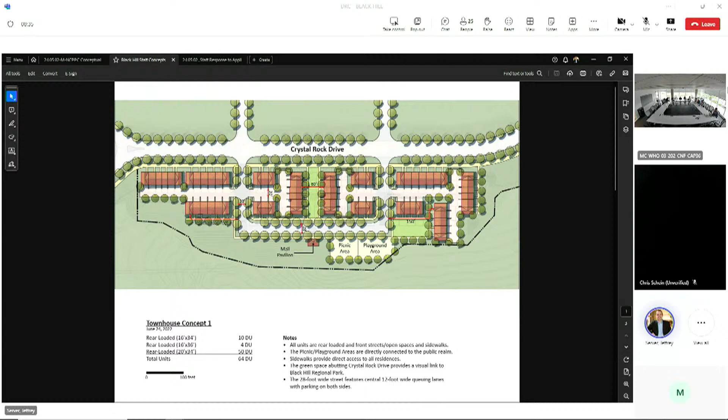So those were the overarching big picture comments we had looking at this. I'm happy to flip through the other schemes if helpful, but they all more or less try to establish the same general idea. It's also worth noting that in all of these schemes, there's a clear distinction in having the fronts face out onto public open space or public streets, so the units are oriented in a manner that fronts along that.

One of the concerns we've had in looking at the orientation of the units is trying to distinguish fronts from backs, and backs facing to fronts and so forth. When they're arranged along that alley, it gets a little fuzzy as to what's the front and what is the back. So these previously prepared schemes really set out to try to address that.

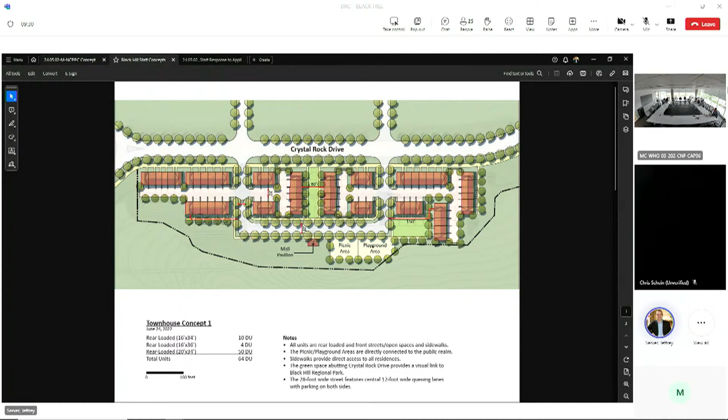I'm happy to turn it over, but I'll share one thing here real quick. This is a sketch that was prepared within the last couple of days, so it's fresh, hot off the press, for lack of a better way of saying it.

It's something we've not had time to share yet and circulate with everyone. This scheme, I'd say, revisits some of the concepts and ideas and comments we've provided previously from the other sketches, but tries to work with it in a way that also respects what has been shared within the current set of drawings.

This scheme does keep a similar type of layout to what has been proposed. In this case, there is that service drive, but the alley is broken up with two curb cuts, much as you saw in the previous sketches.

There's also an opportunity to provide a loop. So where you see it labeled New Street, you have access to the alley, but then you also have this new street, which provides a number of parallel parking spaces for visitors. And then there's also dedicated parking at the ends to the left and right of the units, so you do have a distribution of public parking.

Parking is a big concern. We've heard from a number of applications coming in that this is a growing concern within existing communities as well. So being cognizant of that, this seemed like a good opportunity to introduce some of that within the scheme, while also hoping to accomplish the goal of providing direct, connected access to the playground and amenities at the rear of the site.

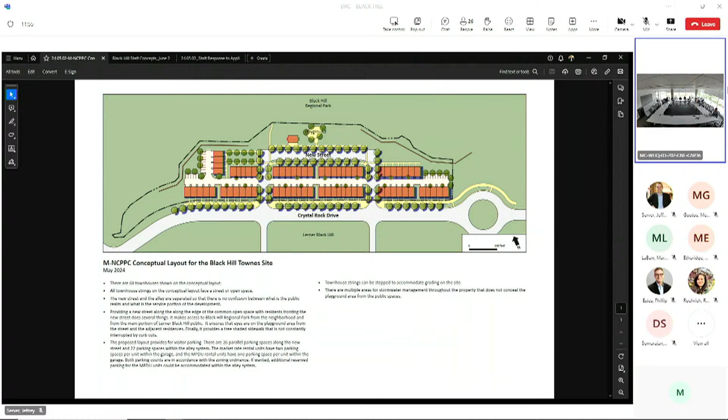So with that, I'll wrap up and turn it back to you, Philip. Okay, thanks. Thank you, Jeff. And then we'll just turn it over for discussion to the applicant.

Sure, thanks, we appreciate everyone's comments. We certainly saw this, we were able to download it yesterday, haven't had a chance to fully evaluate it. There are a number of concerns we have in terms of feasibility, utility connections, what this does to the units themselves, eliminating all driveways, the feasibility of it given the expanded impervious area and the need for more stormwater, with really no space to accommodate it.

So our goal for DRC today has been to go through some of the more interagency-wide comments while we have everyone here to talk through a lot of those, realizing we probably need a separate follow-up meeting with you all, which maybe we could do at that slot next Tuesday, to dig into the layout comments we received in more detail after we also put together more information on our end to have a meaningful discussion on it.

So if that's okay with you, we'll shift to some of the comments that I think involve multiple agencies while we're here, and we'll dive in.

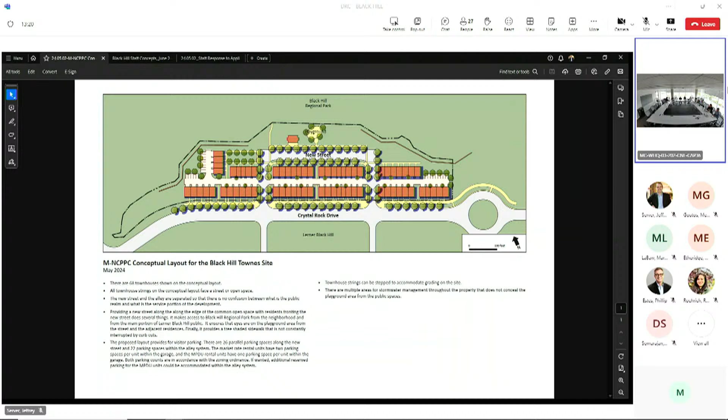There were several comments regarding the retaining wall, some of which I think are easy. There was a question to add top of wall height, bottom of wall height - we certainly can provide that on the plan. But Pat, do you want to give a little more explanation and context for the retaining wall and the challenging grades on site?

Yeah, and like Liz said, we can absolutely add the additional labeling to the spots that are in there - kind of hard to see because the text is small. But what we have here, generally speaking, is that in the center of the property it's more or less flat from front to back, but as you go to either direction, left or right, you get a valley on one end and a hill on the other.

So we have a cut and fill situation on either end of the property as you look left and right on the screen. I think particularly what Doug mentioned was on the left side of the screen, that wall is awful close to the conservation easement. Well, all the walls are close to the conservation easement.

That side is in cut. So on the left side of the screen, we're shearing down, so we are aware of that. Our thought there is that would probably be a permanent sheet and shoring system. We just did this, you can go see it. It's built now at Montgomery College, the PIC MC site. That same situation, it was right against the easement. They just sheared it down and built a wall in front of it. There's no footing or anything like that.

So regardless of the easement, if our LOD is going to be where it is, we just need probably to have that kind of wall system here. In order to avoid that, we have to be grading back into the forest conservation easement 30 feet or something, not to mention layback if you had a traditional wall system. So we're confident that can be built as shown there without encroaching on the easement with a footing or anything like that. And on the right side, luckily we have the opposite.

So we have a fill situation. So we'll just be working up from the toe of the hill, probably with like a segmental system where it's simply a fill system. And therefore we should be able to handle both ends of this thing.

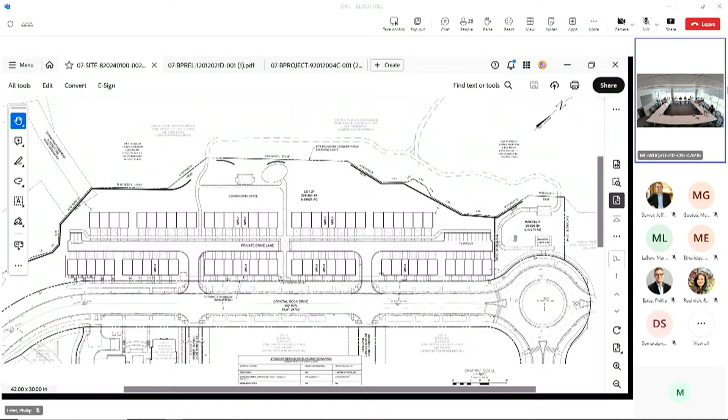Okay, so there were two other clarifications we were going to provide in the PUE. Sam, you might remember from years ago, this whole development was master planned without PUEs. The idea was to have street activation as much as possible, and not lose that 10 feet at the front for urban design. So that's been the case throughout Black Hill.

This frontage does have a Potomac Edison easement 10 feet wide along the frontage, not the entirety, but most of it. That was because when they installed the substation out there, they needed to run certain feeders, and that's the only way they could do it. So our plan was not to grant a new PUE, but just leave that Potomac Edison easement that's there. They're the only ones that needed it. The gas and communication has all been master planned through the community.

We're not running dry utilities longitudinally along the frontage, are we? Not the plan right now, just what Potomac Edison's infrastructure already has in there. Actually, I take that back, I think there is in that same easement. I think we were proactive and put some communication conduits in there, in coordination with them, just in case.

You have what appears like steps and stoops in that easement, is that correct? No, the easement stops at the second driveway on the left. So the steps that are created, that's that grade issue I was talking about. The steps on the left are as that easement ends, and that's critical too, to allow those, because we have to get up to these units. So we don't want to add a PUE where we didn't need more easement.

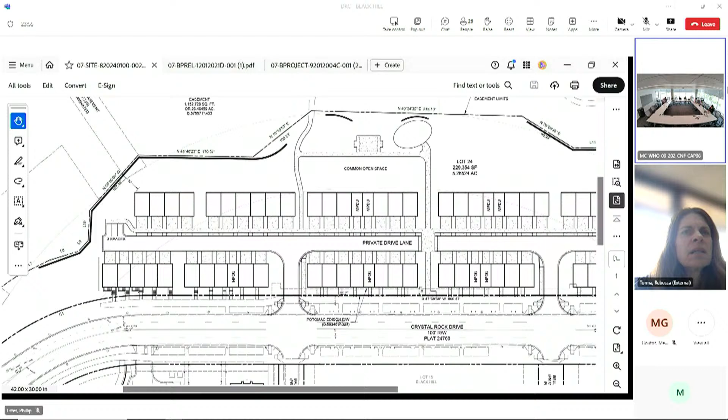I'd like to see a letter from them, because they are more strict than Pepco, that they're accepting of those concrete walkways in their easement. You're talking about just the lateral crossings, the ones that cross perpendicularly, is that what you're saying? Yes. Or whatever else you put in there. Anything you put in there, I want to see a letter from them saying they would accept that. That's fine.

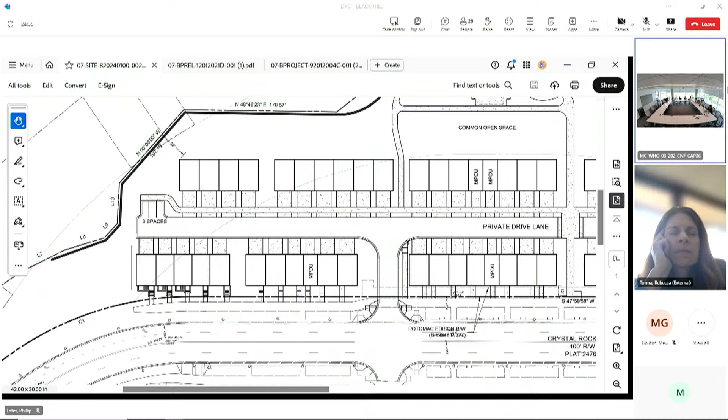Can you provide a note to the extent of the plan? Yeah, I think we may have a conceptual utility plan. Can you put a general note to the extent on the cover sheet? That would be great.

Okay, and then there was another comment, Sam, that you had regarding ensuring these private streets were built to public road standards. I think we just thought we were going to clarify that because it's all going to be constructed as one lot, they won't actually be private streets. Yeah, so it's like a drive lane or something. Yeah, basically the idea is this is going to be one big property, similar to a multifamily property, where it's just internal networks.

And that's also why we didn't have truncation. I think that was another comment that Liz will bring up, that there's no subdividing going on. So, yeah, okay, if you don't have any private road, then I guess the comment is no longer applicable.

Okay, moving to height, there were a couple comments regarding height. We just wanted to seek clarification on one about providing setbacks and height for accessory structures. Melissa, I think that was your comment too. I just wanted to clarify what you were looking for with that, and what accessory structures you wanted us to show that for.

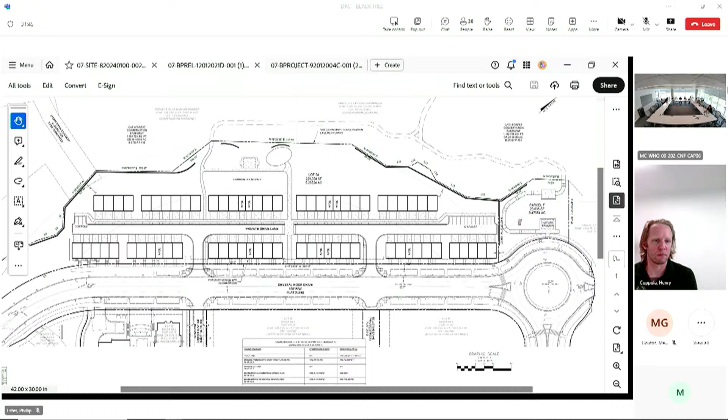Great, thanks. Pat, if we need to meet up or touch base, we're open to that.

Great. And then there were a few DOT comments we wanted to walk through. Pat, do you want to take those?

Sure. One was about truncation. Rebecca, I think you're on here, and I don't know if Deepak is. I think I mentioned the truncation. Our thought is we're not subdividing it, so we wouldn't do any kind of corner truncation. There really aren't any corners to truncate. So unless you disagree, that's how we would proceed there.

That's fine. And then on street parking, I think that was a comment from both staff and DOT about considering street parking on Crystal Rock, which under existing conditions is actually allowed from 7 a.m. to 7 p.m. The concern from DOT's parking folks was there are a lot of drop trailers and things that park in Germantown on the side of the street overnight, and they didn't want that happening in this community. So we looked at that as part of this application, along with sight distance and everything. Right now, the sight distance criteria would mean that, as the road stands today, you really couldn't have almost any parking along the frontage.

Now, if we look at moving the travel lane out, you could potentially get a little bit, but the challenge is, coming off the traffic circle toward the site from right to left, there's a quick need to channelize, and that's a little awkward. I don't know if we could make that work fast enough to get any parking, or maybe get a space. So it's something maybe we could look at offline with Rebecca and Deepak. But it seems like, because of sight distance reasons, parking is going to be a challenge on the street with the 2 curb cuts we have.

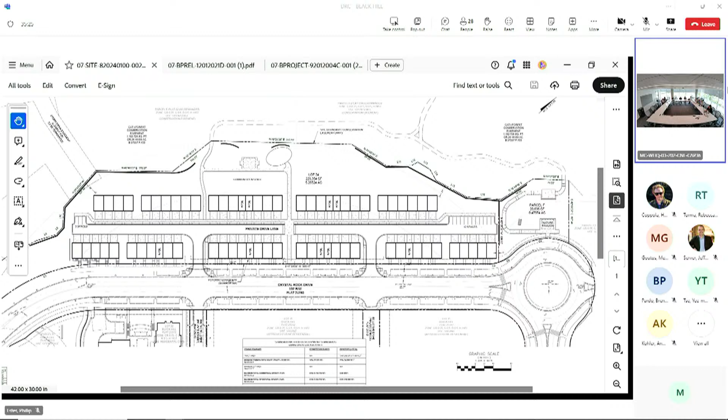How long are your driveways? You mean sidewalks, wide, you're saying, Rebecca? No, length. From like street to street, if you will. No, from back of sidewalk to the face of the building. 18 feet. The driveway. Oh, the driveways for each individual unit. Oh, in the back of it. Yeah, the 18 feet, yes.

So there's 18 feet on both sides, just one side has the dedicated sidewalk and the street buffer. If you're not getting any street trees in there, I'm not sure why you wouldn't put the sidewalk on the curb, because that sidewalk is going to be blocked.

That's likely to be blocked. I mean, I don't know that sidewalk really works. It just could be increasing imperviousness, and you might want to just let them walk in the drive lane.

I think we do have some trees. Actually, we have trees behind the sidewalk, in between each driveway. You can look at L401, but we do have trees on both sides.

Okay, I mean, obviously I have no real authority in that, but to me it seems like you're just getting more imperviousness, and the sidewalk's going to be blocked, especially if you're not putting a tree in between the sidewalk and the drive lane.

Well, I think Rebecca will clarify with Maurice - there was a comment regarding the parking, so we'll clarify that the parking is being accommodated within the garages for these units.

Yeah, but that's the problem we have - we understand that, but people use the garage for storage, and then they come to us after the fact and complain about parking. We have several developments in the county that have asked us to add more parking, and basically we don't have any space. My concern is that these are rentals, so maybe they will just keep their stuff in their garage and park their cars in the drive lanes. You give people options and they will use them.

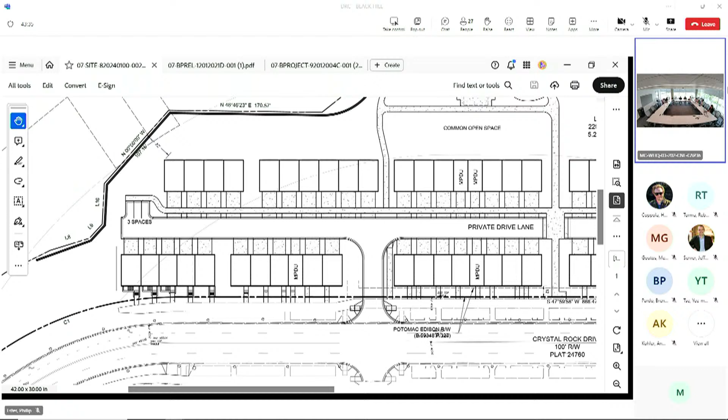But let us know if there's something else someone's looking for there. So you'll be able to have a continuous connection to the trailhead on the left of the page? Yeah, we'll fix this plan. That's just, right, it's just - okay, appreciate the clarification.

Henry, do you want to comment on anything that was said about parks? No, I think we're good.

Yeah, if it wasn't so steep and wild down in there, then we'd want to do the trail back into the park that way, but it's not going to work with the main stem of the creek back there.

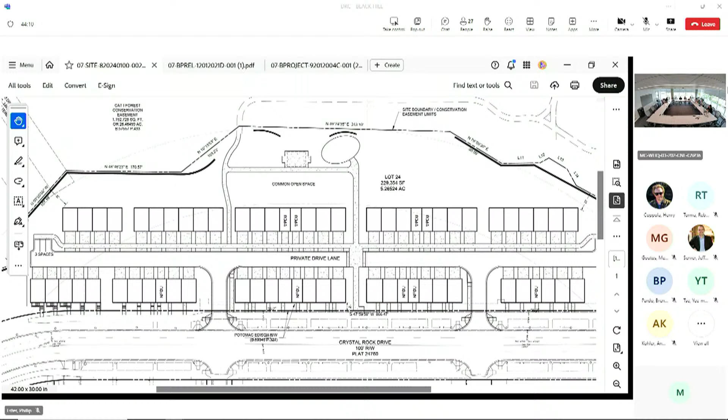Glad to reach out just to have a follow-up conversation to make sure we understand that too, just because we really thought that would be a great benefit to provide that trail connection there. But understand you're looking at different data, so we may just want to connect offline on that to make sure we understand it.

Yeah, sure. Happy to have you guys chat with Bob, our natural surface trail builder, for why he's not comfortable with that. But the short version is it's really steep and there's not a good way to get all the way down in there across the creek and back up in a way that we think is sustainable and good.

And also something to keep in mind are the terms of the conservation easement itself - it precludes any construction. So with the grade being what it is, I don't see a way of putting a trail in there without having to build a stepped kind of system, which then violates the terms of the easement.

Yeah, so I was going to ask that - so we're not going to add the trail connection to the park, let's say. But there was always a master plan to have this natural surface trail through this part of the campus, and then it connects to the hard surface trail.

The trail is drawn straight because it's intended to follow the contours. One trail that runs horizontally in the plan view is fine, as long as we can connect it around. The trail that juts off to the northeast, which drops down, was discussed with Henry regarding the grade issue. The other trail going horizontal, north-south-ish, is okay and fine.

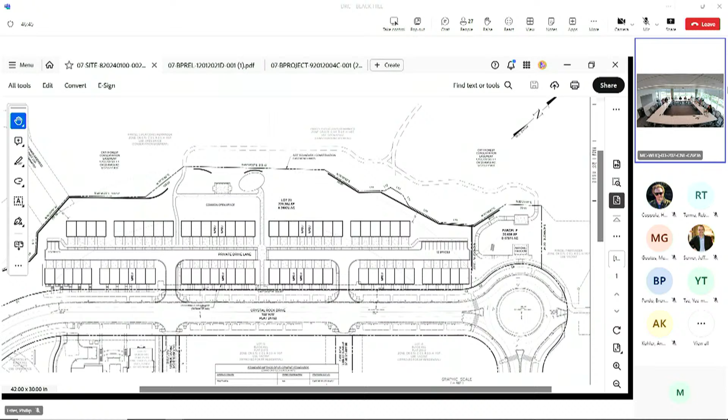Phil, do you have the date handy that we can connect offline on in terms of our first resubmittal date? I can email those to you. Either two weeks from today or two weeks tomorrow - I think it's two weeks from today, but I'll send you those deadlines. Thanks, thank you everyone.

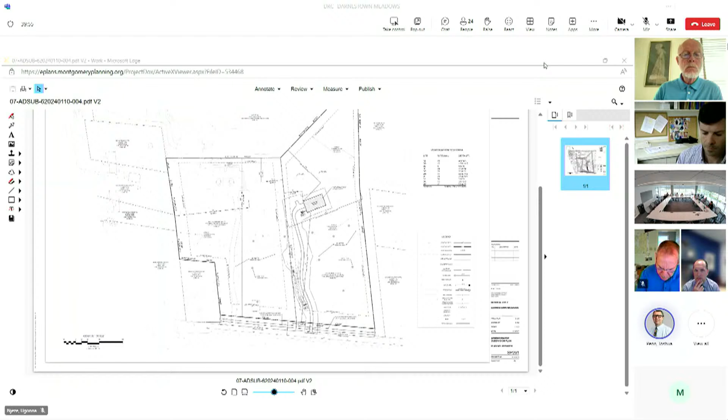Separately, Josh can speak about the forest conservation requirements and the triggers for those, which are different. The final forest conservation plan is required to be done prior to plat. Follow-through of the requirements is going to be tied to any construction activities moving forward, but whoever moves forward with it will be tied to whatever conditions are placed at time of the plan.

I just wanted to be clear. I know we're talking about the frontage improvement first, but the way you were responding made me think you meant all requirements. So I want to make sure it's clear some would be required prior to plat, some prior to building permit. The frontage improvements would be building permit. We wouldn't make you do any preliminary grading work or anything like that prior to that.

That's helpful. Thank you.

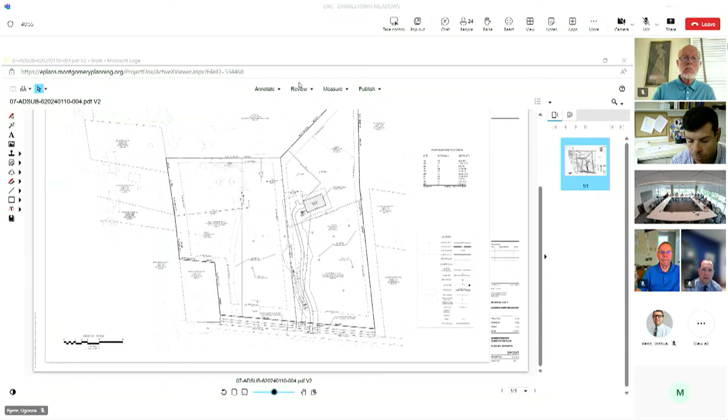Do you have any more questions, Mr. Marco? I didn't, thank you though. I think that was all. All right, okay, thank you everybody.

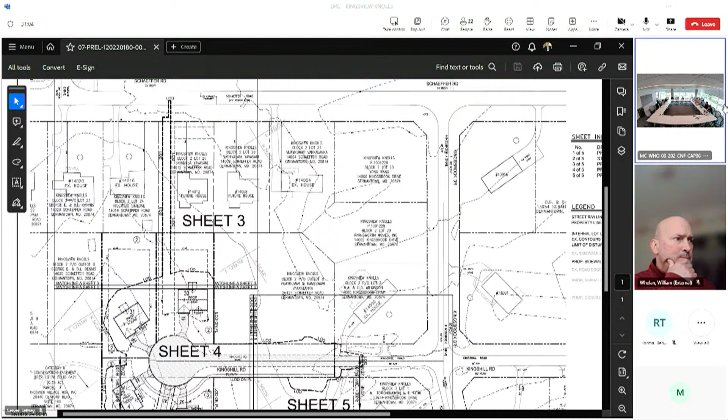And going across Coachman, that's asking people to tear their fences out and encumber them with the maintenance of a path. I just don't see how that can happen really, in the common sense world. So it's not that we're objecting on a technical basis. We're objecting on a private property entitlement issue.

And with WSSC, I don't know if they're on the call here today or not, but I've dealt with them for 40 years and I know how flexible we are. No, we are not. When it's an easement, no, because we use it for maintenance. So we don't allow anything over our easement, only crossing, like you said before.

We can talk about this later to explore other possibilities, specifically about this, because we really want the connection from the proposed development to Schaeffer Road for dimension reasons that I won't go into before. We were looking for the shortest distance possible. That's why we suggested that sort of shortcut, and it seemed like there was room and opportunity to do it.

If that's not the case, then we need to look at other ways to get there. Maybe around the proposed cul-de-sac extension, around the other way of the block. Because it is an important connection.

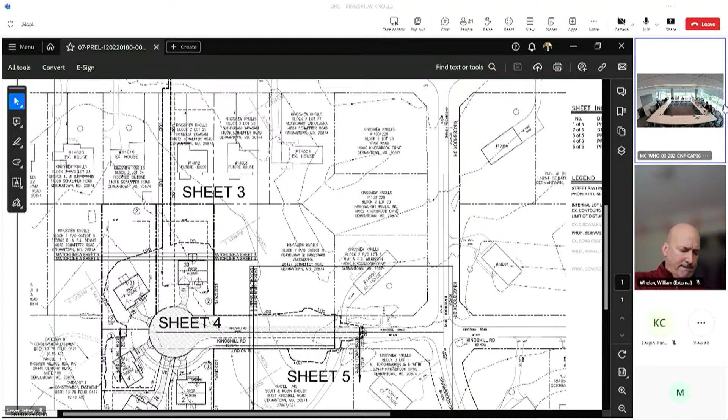Who do we need in the follow-up meeting besides planning? We need DOT? Yes. Who else? Stormwater management? Stormwater. Who else? Transportation. Okay, yeah, our team, yes, our team.

Just before we finish here, just to clarify, the WSSC easement that's shown there, is that existing or is that proposed? There is an existing 25-foot WSSC easement, and there is a requirement to expand that to 30 feet.

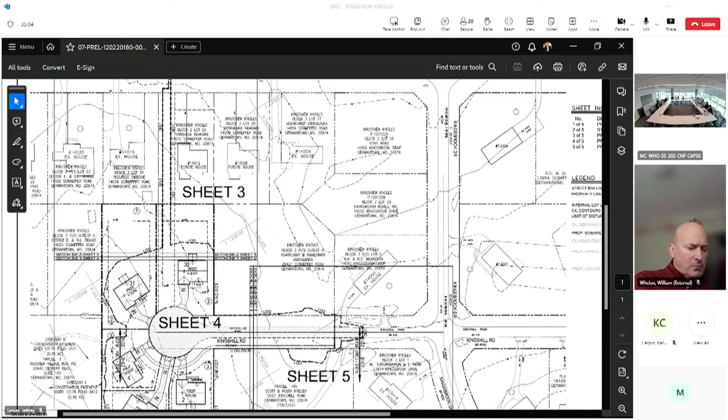That's shown going up and down on the page, right? From the cul-de-sac. I know people can't see this online, but I'm going to point it out for your benefit. This is the line between 24 and 25, and this would be the 30-foot easement here, which would go all the way through the cul-de-sac.

And which we'll identify and label and show for the follow-up meeting.

That goes back to the beginning where I said my magic box is getting low on fuel. So, you're trying. All trying. We'll try harder.